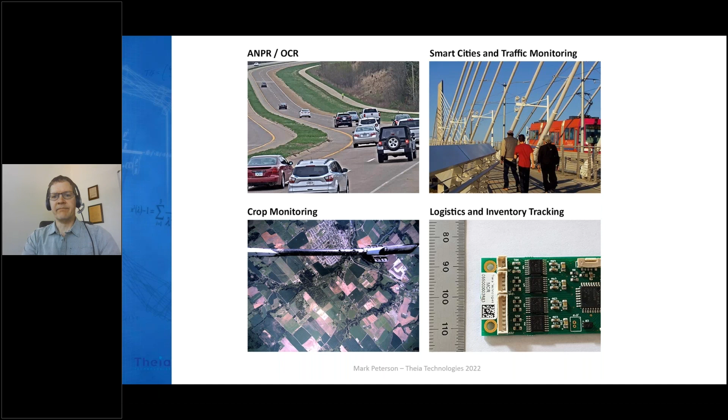Although the majority of these applications can be set up with a fixed lens at a fixed focus distance during manufacturing or installation, there is a growing number of applications that can benefit from adjusting the focus or focal length after manufacturing. And adjusting might have limitations due to access to the lens. For instance, limitations may be due to packaging. This highly integrated vision system in a mobile robot may make it difficult to physically touch the lens after it is assembled.

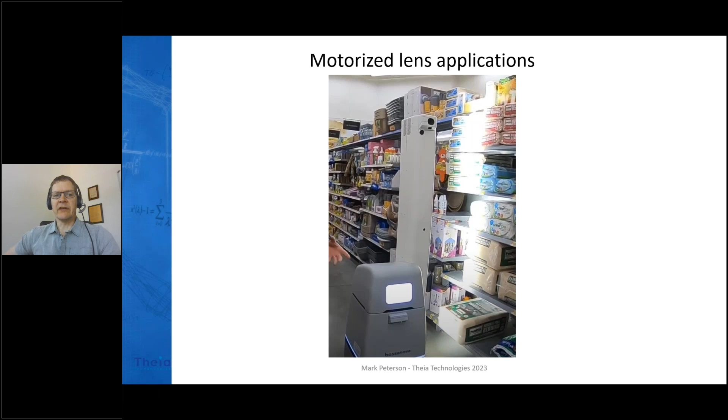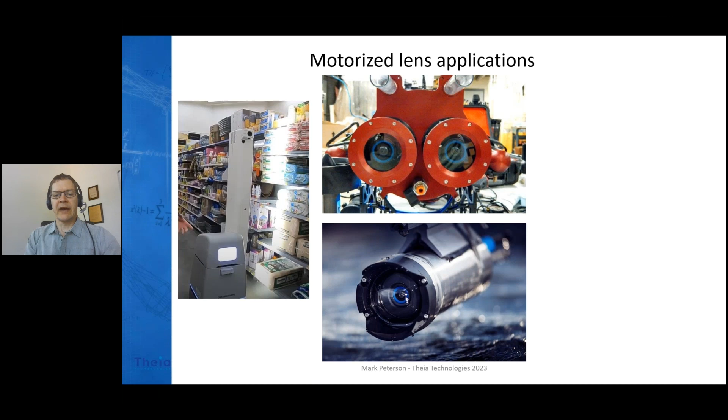Or maybe there's a protective window that needs to be placed over the lens, such as these underwater robots, that could prevent focus and field of view adjustment after the window is installed. Or the limitation could be external due to environmental issues such as traffic under a tolling system such as this. It's very expensive to stop traffic just to focus a lens on a gantry, and arranging for work zone traffic control is an external limitation.

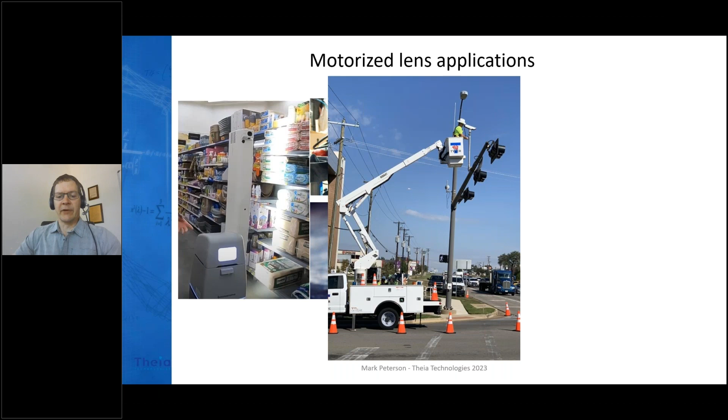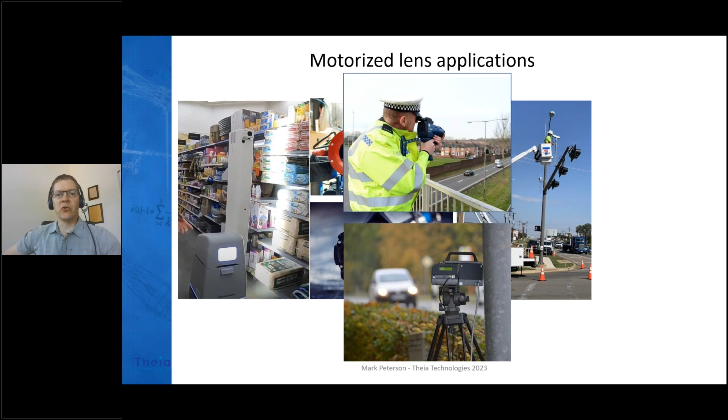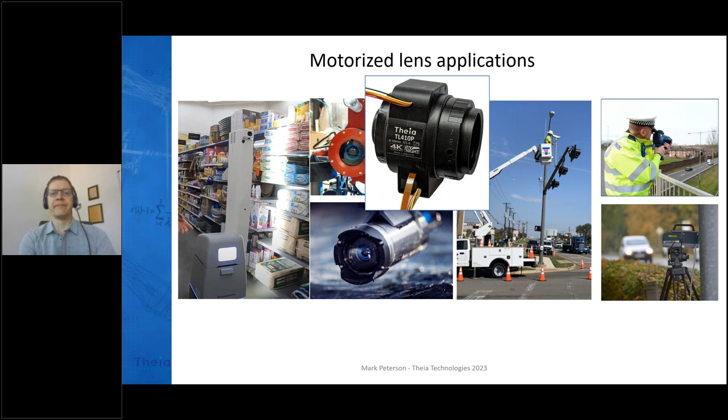Or the lens could be used in a mobile system that can be moved around to look at objects at different distances. Allowing the user to access the lens for any focus adjustment may introduce a source of uncontrolled error because the lens may be adjusted incorrectly. So one solution to all these issues of limited access is to use a motorized lens. With motors to control the focal length and focus groups inside, it's possible to remotely and automatically change these without giving the user any physical access to the lens. An embedded computer or even a microcontroller can adjust the lens for optimum performance and field of view.

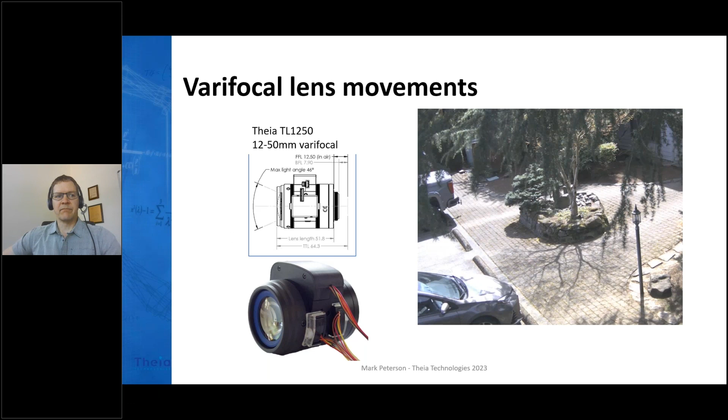This video shows that first of all, the focal length is changed, but then the focus group must also be moved to get the object back in focus. This separation of focus and zoom allows lower cost of the lens and performance improvements, such as faster f-number.

For example, Theia offers the motorized 12 to 50 millimeter varifocal called the TL1250. That's only 65 millimeters long, and it's f/1.8 at the wide 12 millimeter focal length, going down to f/2.2 at 50 millimeters.

This is a very compact telephoto varifocal lens, and it collects a lot of light because of the fast f-number, making it good for outdoor applications, which are light-starved applications with uncontrolled illumination. These applications may need to work on cloudy or rainy days or even at night.

This lens is used in many applications. One of the largest markets is intelligent traffic systems and tolling and other ANPR vision systems. These are generally large installations involving many cameras, sensors, and barriers that must be installed on site with minimal disruption to any existing traffic. Traffic is diverted while the gantries and cameras are quickly and efficiently installed over the road, often at night when there's less traffic.

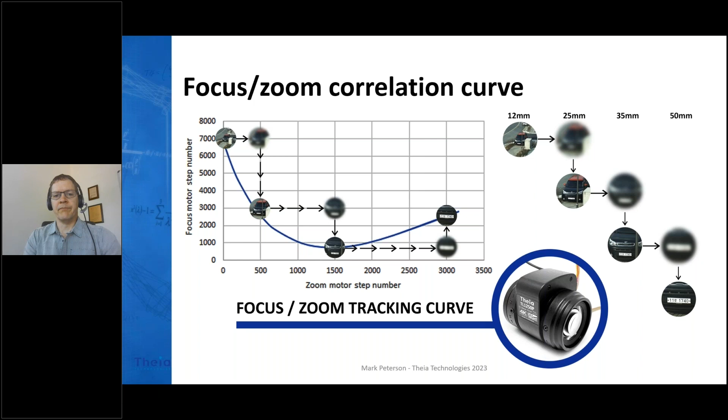So there are many constraints when the optical designer is designing a lens, and because the primary function of the lens is to create a good image, the optical parameters will usually receive more weight in the merit function than the mechanical parameters, such as the focus motor and zoom motor actual steps, absolute steps, and their relationship between the two. So this looser tolerance on the motor position results in a variation from lens to lens.

As a consequence, there is no universal correlation between the focus motor step and the zoom motor step number to guarantee that an image is in focus, especially when there's a large number of steps for focus and zoom motors, which implies a very high resolution lens. Theia Technologies TL1250 motorized lenses have about 3,000 steps for zoom and 8,000 steps for the full focus range.

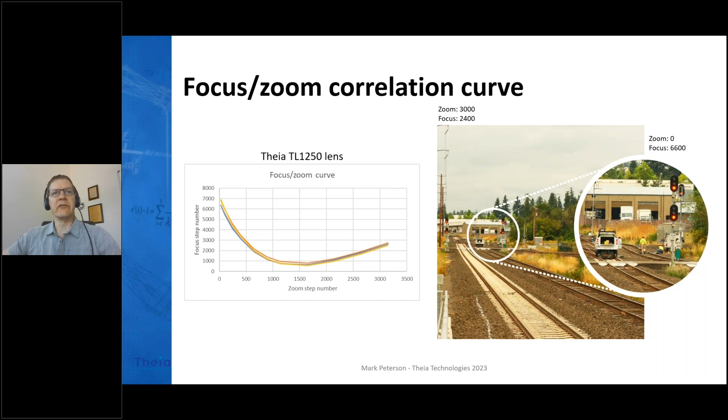The theoretical curve for focus zoom tracking is shown. There's a large variation in the focus motor step position, but you can see these 4 different lines are very similar, and it's a similar curve with slight variation from lens to lens. So if we look at the 50 millimeter telephoto side where the zoom motor step is 0, that's on the left side of this graph, you can see that the focus motor step difference can be as much as plus or minus 300 steps from the lens to the design value.

It's a very large number of steps. Although nearly 8,000 steps is available for focus, as I showed in the previous plot, the range is actually pretty tight. And so this plus or minus 300 step variation is a large difference. So in the case, if you set zoom lens 1 to the design value and zoom lens 2 to the design value, they may not be in focus based on just a theoretical position.

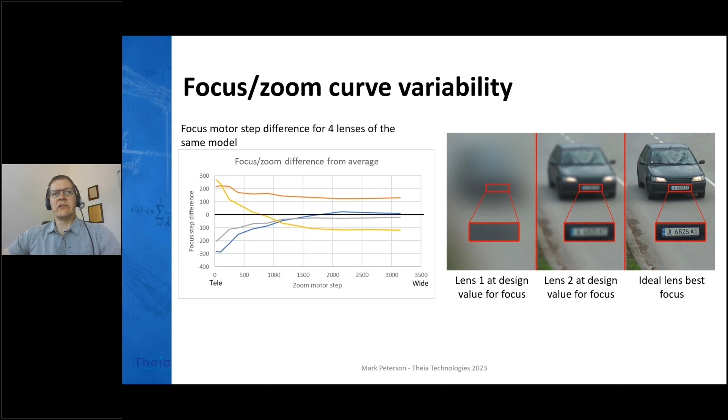But with some effort, you should be able to get both of these lenses into the best focus position to within about plus or minus 20 steps for the highest resolution image, as shown on the right.

Similarly, this focus zoom curve is a function of object distance and is also variable from lens to lens. So when changing the focus from infinite object distance to 2.5 meters, for example, the focus may need to move 600 steps at a focal length of 30, which is approximately zoom step 1000. But a different lens might move only 500 steps for the same object distance change.

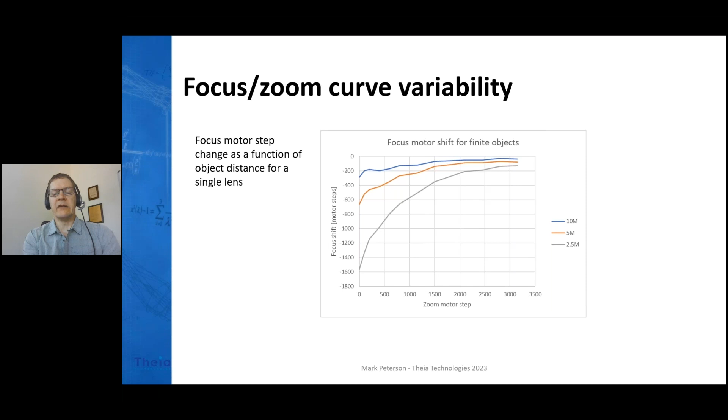This variation in itself is much greater than the plus or minus 20 steps, and it must be added on top of the lens to lens variation just for the focus at infinity. So you can see that applying a theoretical curve may not give you the best focus performance and will result in an image that's most assuredly out of focus.

So although this focus zoom curve is highly variable, it's due to manufacturing tolerances in the lens. And without any individual lens calibration, the best focus will have to be found using an autofocus routine after each focal length adjustment. And without the knowledge of the direction or distance away from the design curve, the autofocus could take some time. So a well-characterized focus zoom curve is very beneficial in this case. It can speed up the autofocus routine by letting the user know approximately where to find the best focus motor step number for any focal length.

Because of the variability, each lens should be calibrated individually to find the best focus zoom curve and make the setting much more precise and much faster. Theia has calibrated lenses such as the TL1250P-CAL, which is the same 12 to 50 millimeter varifocal lens I described earlier, but it's calibrated at the factory. So the end user and integrator has access to this focus zoom curve calibration for each lens individually, as well as other data frames such as distortion or focal length versus zoom step number.

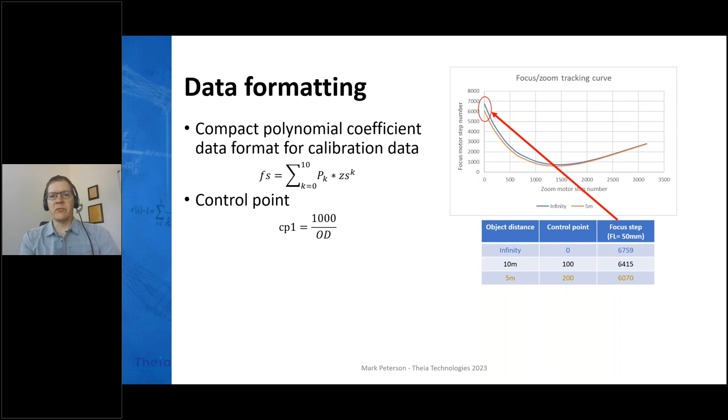And then once you know the focus motor step position, the expected step position for that lens, you can easily go there and do a fine focus adjustment if it's not quite exactly what you need, but you'll know how to get there quickly, and you won't waste time just searching a large space.

And there are other calibrated data frames such as focal length, distortion, aperture size, all included in the same file. Some of these are design values, but many of them are calibrated on an individual lens-to-lens basis. So as you can see, there are a growing number of applications that require motorized lenses. These motorized lenses can be used for setup when safety or accessibility warrants it, or during normal use when controlled by an embedded computer and you want the flexibility of a variable focus or focal length.